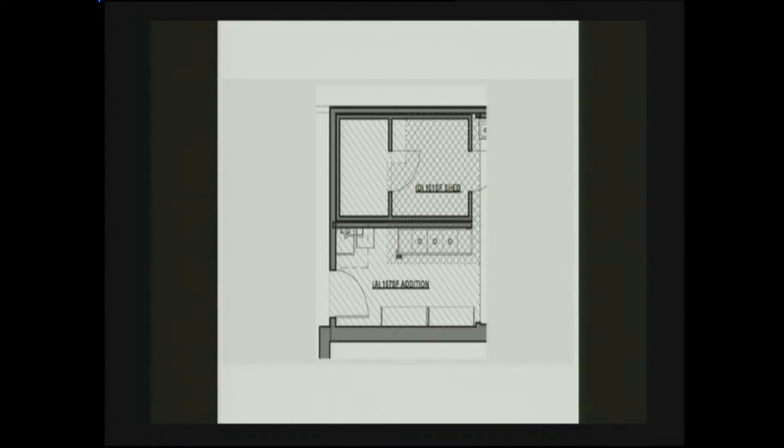In terms of the area of work, you'll see there on the sheet a pretty simple set of plans. The additional area in plan view, as I said, what we had already previously approved was an employee patio in the rear there and trash enclosures, fenced area.

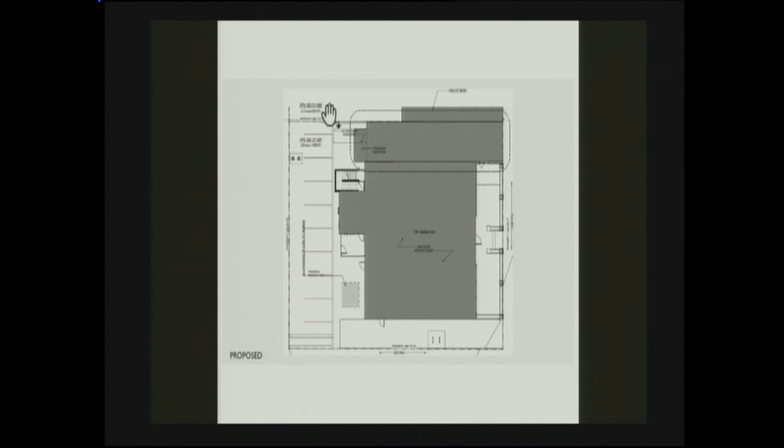So essentially what we have now is the addition would fill what was the previous employee patio area. And then this rectangle here is the temporary restroom that would actually be demolished, so that wouldn't be a permanent fixture. The trash enclosure would still function there.

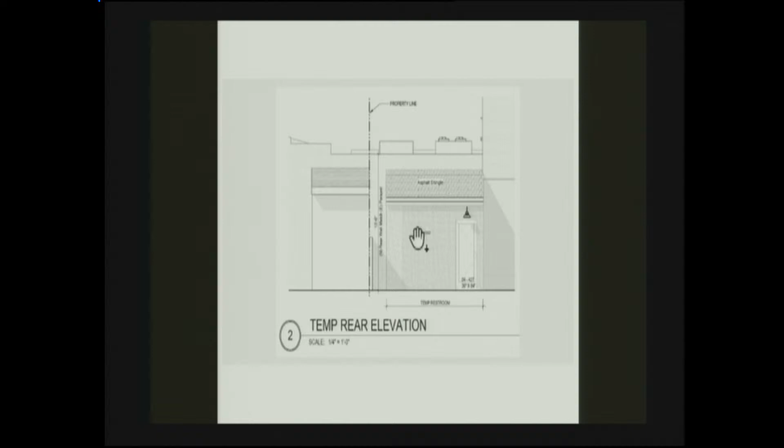So if we looked at it in elevation, here's what's there now on the right-hand side, and the little kind of tumble-down storage shed, which would temporarily look like this because this is the temporary restroom, and then permanently look like this. So the door into the facility, this shows that addition popping out, and then the fenced trash enclosure. In terms of its elevation, when you looked at it from the alley, it's basically the same as it was.

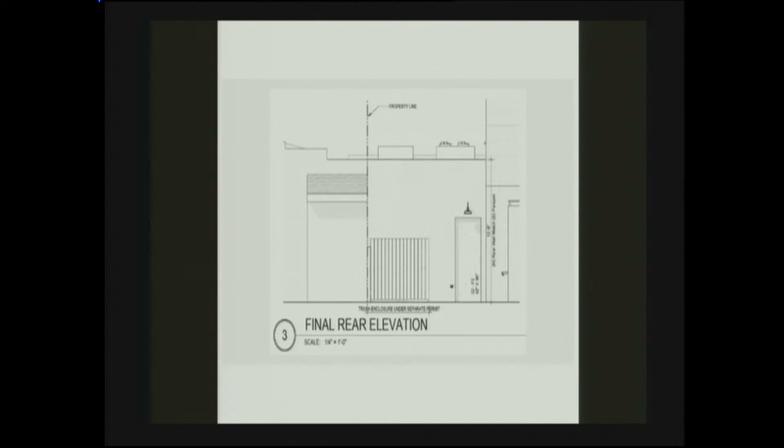That's it, I'll leave it to the applicants to fill in anything I may have missed. Oh, and we did have the project historians review it, and they're not concerned. These were not original portions of the building or part of the main Palms building itself.

So that's it for me. Anything you'd like to add? Well, I used your presentation, so it was really easy. Yeah, we're available for questions.

So my one question, just assuming that we need that trash area back, that's why it can't be a permanent installation, and that we're just limited on the square footage? That was my only question. Other questions from the board? Unfortunate you have to do that, but it's fine.

Do you need a vote? No, it's matters by staff. Just want to make sure everybody's comfortable with it and not something that would need to come back for formal review. We're not planning on taking this back to Planning Commission. The director can handle it as a minor director level change under our current ordinance. So we just wanted to make sure the director would like your feedback to make sure that's appropriate.

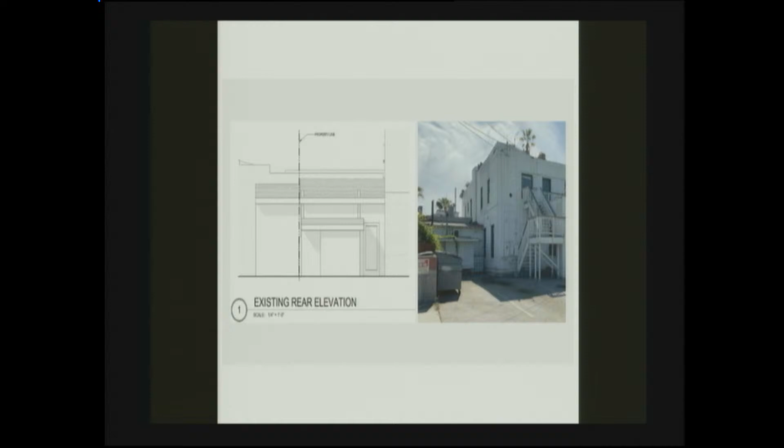Does anybody have any comments they want to add to the record? No, all good? We should go ahead and open it up for public comments since it's non-agendized, but it is a project. Since I missed the last meeting, this is my first go-round as official chair, so I apologize. Thanks for bearing with me.

Any public comment on this item? Anyone on Zoom? Thank you, Chair Blakemore. No one over Zoom. Okay, I think we got what we needed. Thank you, board. I think the applicant has what they needed, and we'll just keep pushing through, circle back on the administrative approval, and get that moving next week. Thank you.

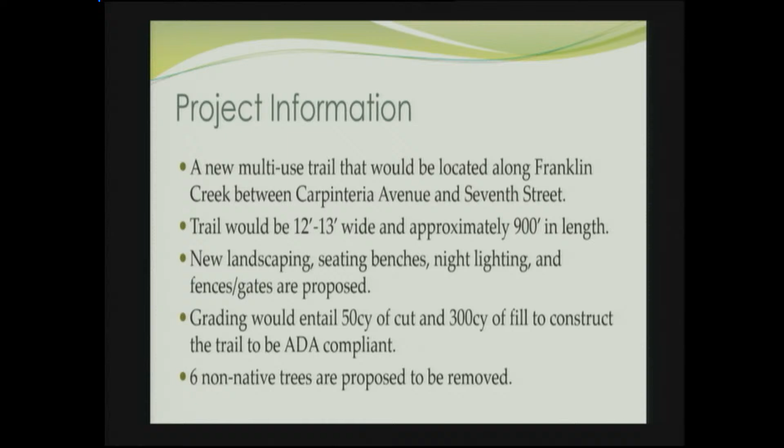So this is basically going to be a connector trail to replace an existing informal trail. The city received a grant as part of the Safe Routes to Schools program, which Josefina can elaborate on later. It's to improve this pathway with a proper trail instead of this informal dirt trail, connecting Carpinteria Avenue to 7th Street, which is also a major corridor to and from Aliso School.

This trail is also dual purpose. It's also flood control access because this is on flood control property, county flood control property. So the trail is going to double as access for their equipment to get in and maintain the creek channel, as well as for bikes and pedestrians.

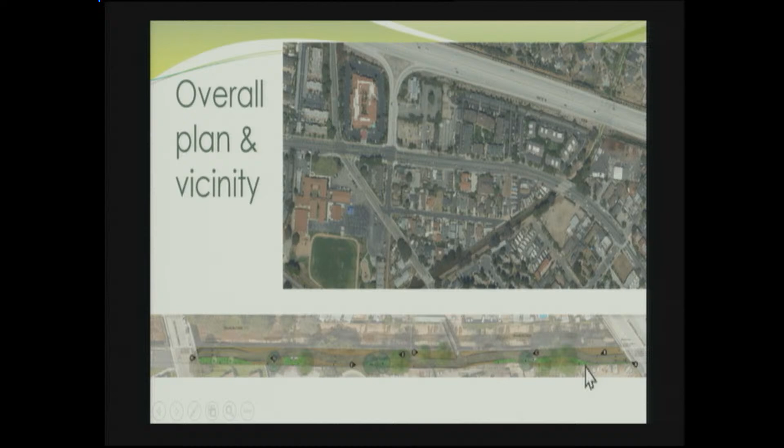And here's the south side of the plan, a little more detailed. So here's the bridge, the trail would start here. It's going to kind of meander to be somewhat natural. There's a little bench area proposed here.

No connection at the end of 8th Street. Just a couple people were wondering about that. There's not a connection at 8th Street, it's just a fence along there. Another little bench area here.

And then moving to the north towards Carpinteria Avenue, the trail comes along. This is where that existing bridge that comes from 9th Street ties in right here. And then there actually is access from the other end of 9th Street here to the trail and a little sitting area. In this area, there are 3 existing sycamore trees, which during our preliminary conversations with the Coastal Commission, they were very strong with their recommendation to keep those trees. So the applicant team has done a really good job, they had to do a lot of modifications to the trail, the layout, and the lighting to preserve these 3 sycamore trees here.

So you may recall these 3 sycamore trees from the Clintner project next door. The trees have been preserved, and when we get to the details I'll show you the special type of footing and permeable ground cover that they're using for the trail in that area to preserve the trees and protect the roots as much as possible. And then come down here, and it ties into Carpinteria Avenue.

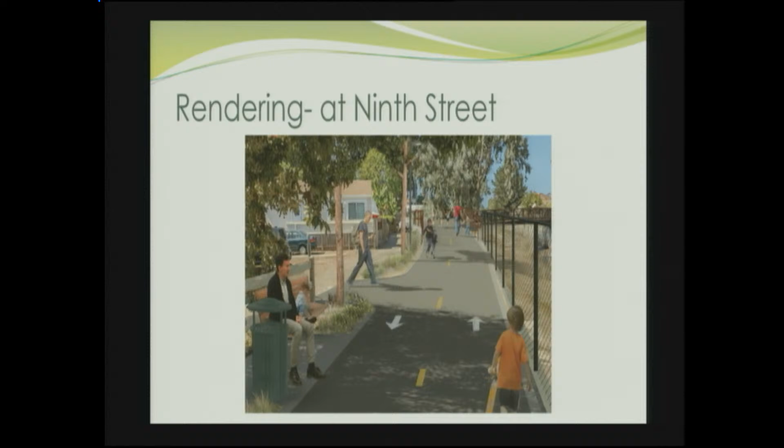Okay, and for the benches, they're proposing these two different styles.

And then these are the replacement fencing along the creek. There are five access gates to the channel for flood control maintenance, and then just the regular fencing along, and it would have the black vinyl coated chain link, and then with the fabric covering.

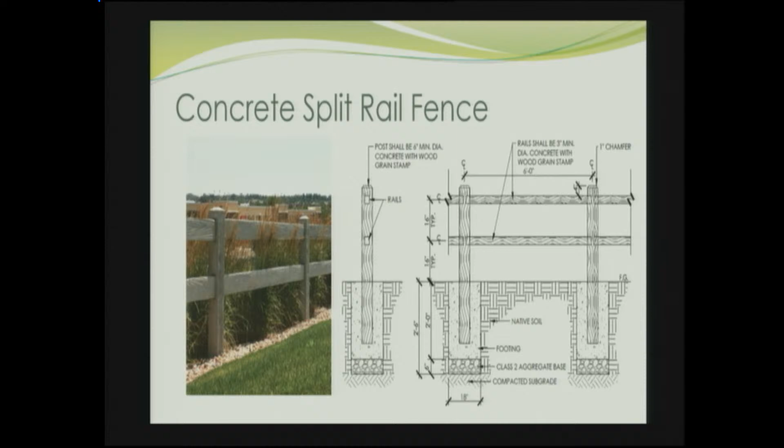And then here's the concrete split rail fence detail. This would be near the 9th Street entrance to the trail, because bikes could come in there too.

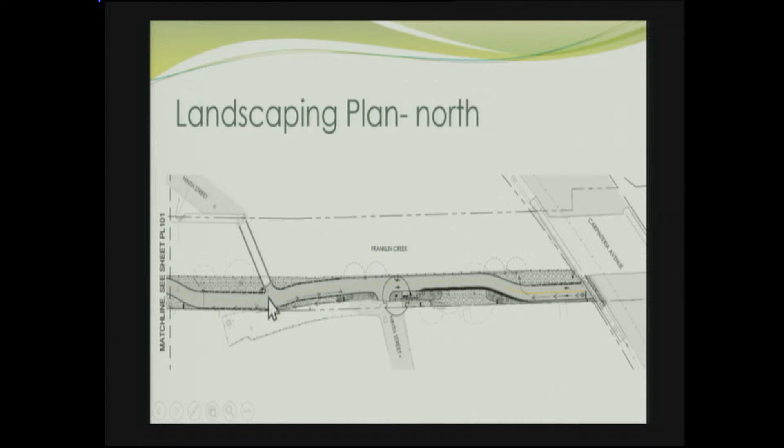And again, here we're getting back to the other end of the trail. Here's the 9th Street Bridge coming in. Another sitting area. Here's another new tree. And then here's where the sycamores are.

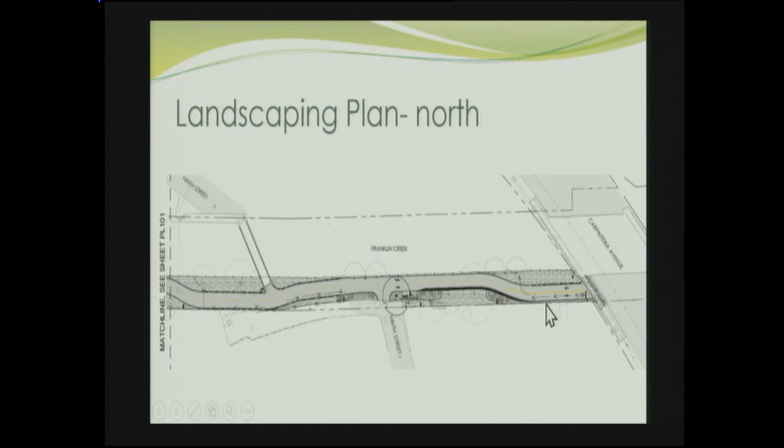And then Carpinteria Avenue. Now, the landscaping plant palette, Amy, we are going to need your input on. So we have our creek preservation program, which requires any permanent landscaping plants along creek corridors to be natives. And the applicant has provided a landscaping plant list.

The trees include our street trees. The island oak, I know, is a native that would count, and I know the toyon are natives, but definitely we're going to need your input on all the planting and your approvals that they're native. I think these ground covers are both natives, but the shrubs and the ornamentals, we're definitely going to need some input on which of these proposed species in the palette are native and what would be appropriate to use along the creek corridor. Or if there's suggestions for another species that you think would be better, we'd like your input on that as well.

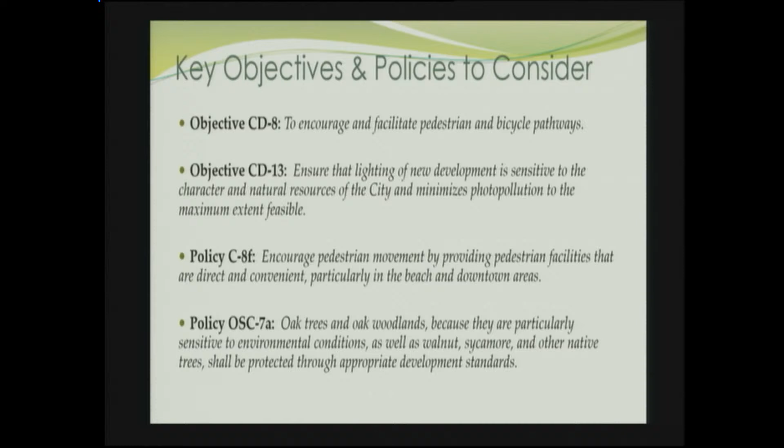So for the key objectives and policies to consider tonight: Objective CD8, to encourage and facilitate pedestrian and bicycle pathways. Objective CD13, to ensure that lighting of new development is sensitive to the character and natural resources of the city and minimizes photopollution to the maximum extent feasible. Policy C-8f, to encourage pedestrian movement by providing pedestrian facilities that are direct and convenient, particularly in the beach and downtown areas. And Policy OSC7A, where oak trees and oak woodlands, because they are particularly sensitive to environmental conditions, as well as walnut, sycamore, and other native trees, shall be protected through appropriate development standards.

So tonight for the board's discussion items, we'd like feedback on the proposed multi-use trail design, the proposed tree removals, and the proposed landscaping species, the proposed products for the benches, the fencing, lighting, and waste and recycling receptacles, and the proposed exterior light fixtures, including night sky compliance.

And just to add, regarding the proposed products, the light fixture design and the trash receptacles have been chosen because they're consistent with other ones that we use around town. And that concludes my presentation.

All right, thank you, Cindy. Did the applicant want to provide some additional information? Come on up.

Only Richard bites. The rest of us are very friendly. Just kidding.

I just wanted to say thank you for taking the time to review this project, and I wanted to introduce myself. My name is Josefina. I am the assistant engineer with the Public Works Department and also the project manager for the Franklin Creek Trail project. And with me, I also have Kayla, she is the landscape architect, and to the right I have John Lawson, he is the Public Works director.

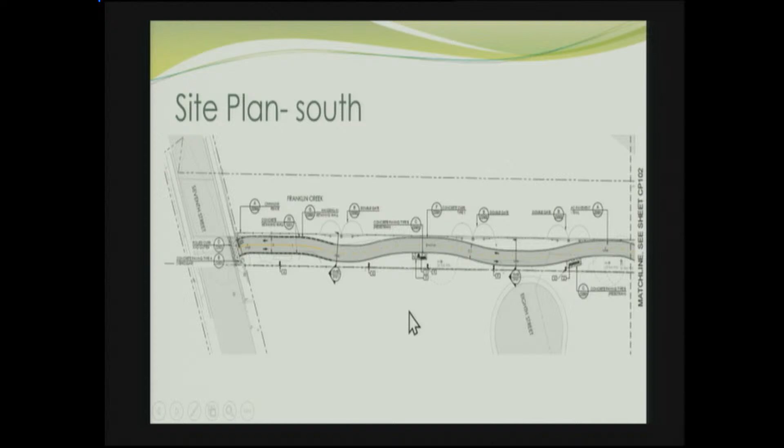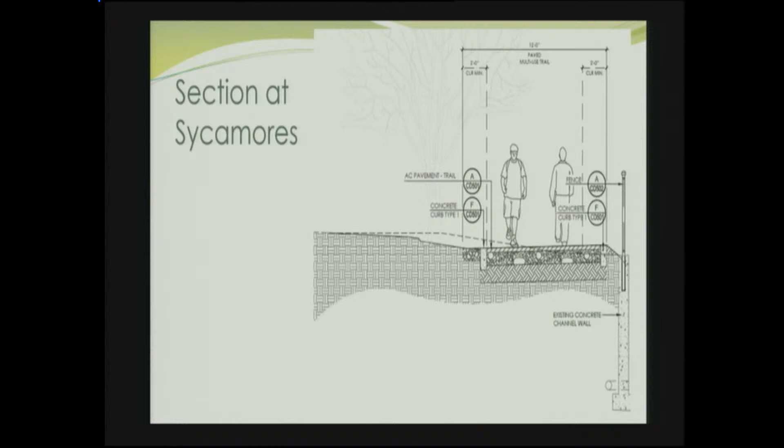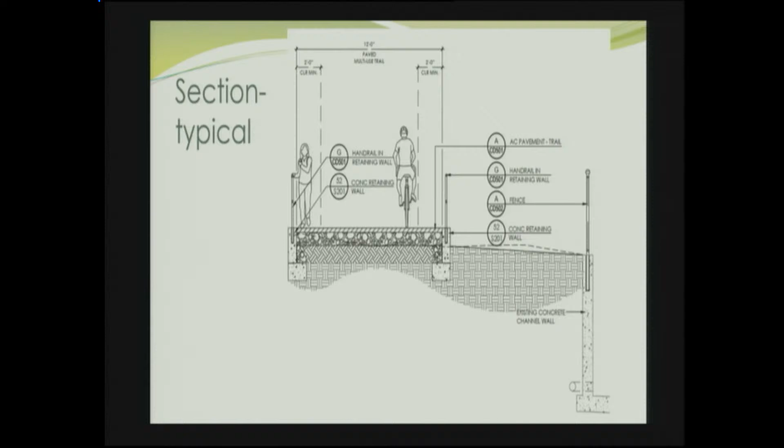With the Class 1 bicycle facility and allowing space for maintenance vehicles, standard trail widths are 4 feet each way, so that's what's driving the 8 feet total with the 2-foot clear shoulders. That's all usable space — it's intended for clear space of handlebars so nobody's running into things. Then on the lighting, the light pole fixture head is set at 10 feet, and the top of the pole is at 12 feet.

So that's just one clarification there. The lighting team worked closely with the planning department to comply with the Coastal Commission and creek preservation requirements, reducing the photometrics from some of our previous layouts to avoid impacts on the trail into the creek, and working with county flood control since this is their property. We were not able to place lights on the creek side, which is why you see them along the other side, working with dark sky compliance and utilizing a light fixture to reduce spill on the back side and make sure we're not disrupting neighbors.

Thank you, Kayla. That concludes us as applicants.

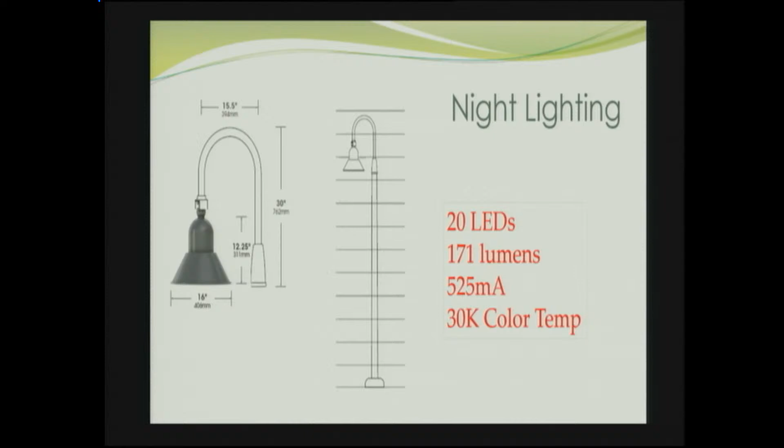Madam Chair, board members, thank you. I'll just add in, for what it's worth, coming from the CDD and planning side — Cindy has done a lot of work, thank you. Even though they're our internal customer, still public works staff, we in CDD have our local coastal plan requirements, including the Creeks program, and coastal commission communication on a monthly basis with them. So, I think on the CDD side, when Cindy and I first looked at the project, we were like, oh, we'll just shrink down the path and do this and use permeable and all.

As we got more detail about the nature of the path and the specifics of the grant funding, and the classification of the trail and safe routes to school—that it was not just pedestrian, it's for bicycles—it adds a whole other layer of requirements that wouldn't normally give CDD or your board as much flexibility, if it was some less formal arrangement without these funding requirements attached. So the public works staff came in with this project about 6 months ago, maybe February 2024. It wasn't because we didn't want to move this project along; it was because once you realize there are strings attached to the grant, it became not as easy to just make concessions and push it through. Just adding a little context there.

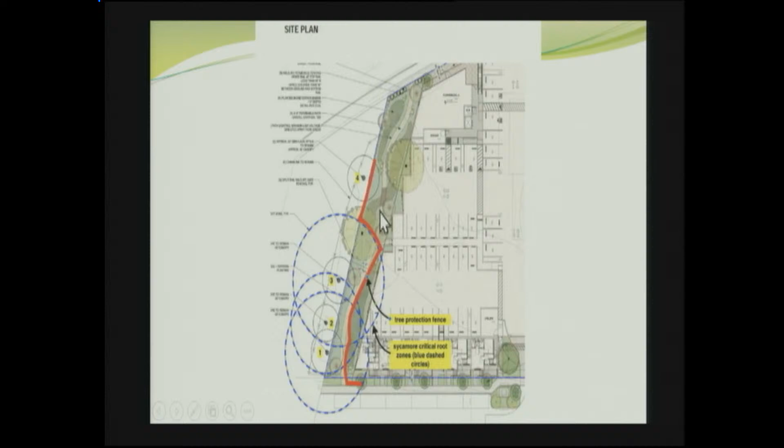So no conflicts there, and thank you, Cindy, for bringing this up. This was part of why we had to go back and forth so much on the layout of the trail, to make sure we save those sycamores, because we would not be doing our job as a city to have a city project impact trees that we were making a private applicant protect.

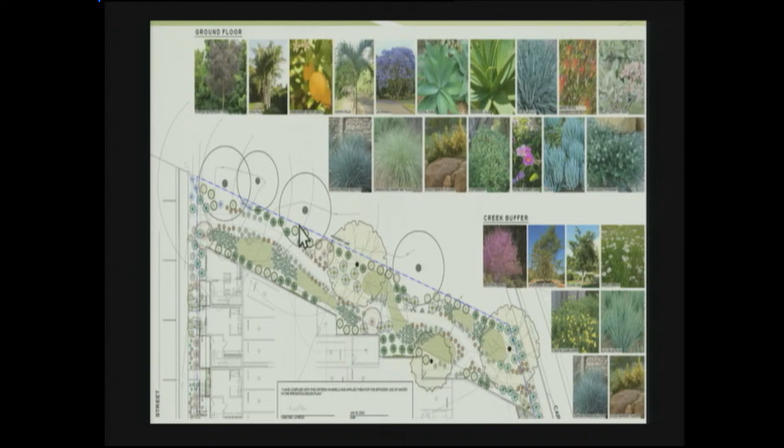I was going to comment as well on the drainage, that the city would not be allowed to drain off onto adjacent property, so our project is handling our drainage on site as well.

Thank you. Okay, any questions? No question.

I had two questions. One, just in light of the goal of the path collecting from the neighborhood, why was the decision made not to try to get anything from 8th Street? Just curious, because you do connect at 9th. So just wondering, because the cul-de-sac, it looks like it would be possible, but maybe I don't understand.

Was there any—I don't know, John, if you could speak a little bit to this—but I believe it had to do with the right-of-way at the end of 8th Street, that it was private right-of-way. Madam Chair, board members, so 8th Street is a fully improved roadway or street.

As you can see, it's an existing cul-de-sac, it has its own drainage, curb, gutters, sidewalks. 9th Street, as you know, is unimproved. So this project was also an opportunity, though not necessarily to directly address the lack of surface water drainage on 9th Street, but this is really just concentrated on the Franklin Creek Trail. The trail is not intended to take the surface water runoff from 9th Street.

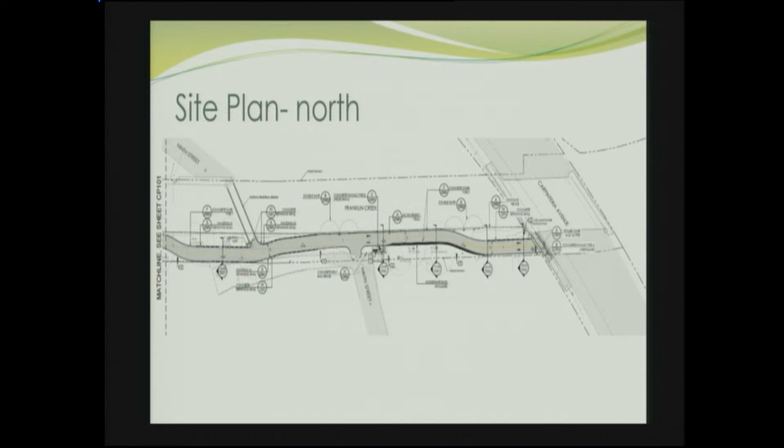Actually, the Clintner project at 4745 Carpinteria Avenue has, to some extent, been conditioned to improve the north side of the roadway, to also include curb, gutters, sidewalks, and connect to an existing or improved drainage at the terminus of that street, if you recall those improvement plans. So 9th Street still has some ways to go in terms of improving drainage, but fortunately you have a development project that's already going to address the north side of the street. This particular project, to answer your question again, Madam Chair, is not intended to take 8th Street drainage into the trail, because 8th Street is already improved.

My question wasn't necessarily just drainage, it's people—access for kids. I mean, if there's homes, I assume those are... I didn't get over there, which I really wanted to. There's apartments on 9th Street, but 8th Street is over that way. And I just wanted to see if there are people close enough there, because I know several of my children's friends would just go ahead and jump the fence and go over.

So just trying to see ahead into the future and plan for it accordingly. That's more of a comment than a question, so I'll retain that. But my other question is, when I'm developing things like this and end up with this much square footage of impermeable surface, I have to do some permeable paving. Is there a reason why all this is asphalt?

Yes, I could address that, because I was wheeling and dealing with the county flood control district on this one, and this is by my direction to the consultant here. As part of the deal with the flood control district, this is technically a maintenance road, so though the city has a secondary use agreement, it is conditioned by the flood control district to provide provisions for access to the channel.

So what does that mean? That means we have to provide an impermeable, asphalt concrete surface, structurally designed to accommodate their trucks or equipment to go in and clean out the channel. So that's the impetus of why it's pavement, it's impervious. So there's a higher load anticipated on the paving, so pervious paving wouldn't comply with that? Yes, ma'am. Got it. Okay.

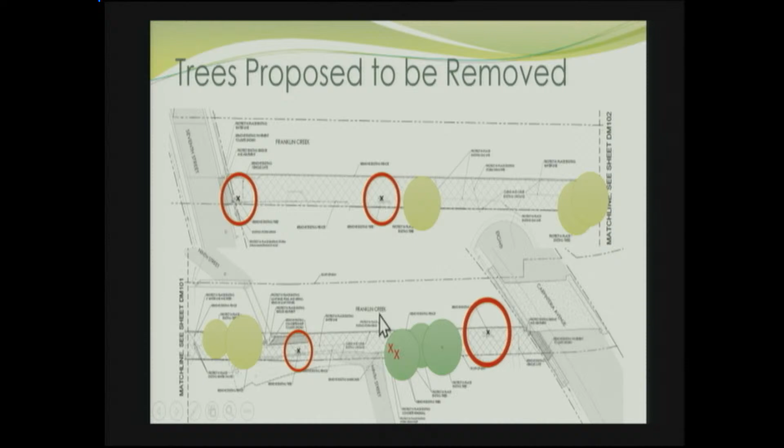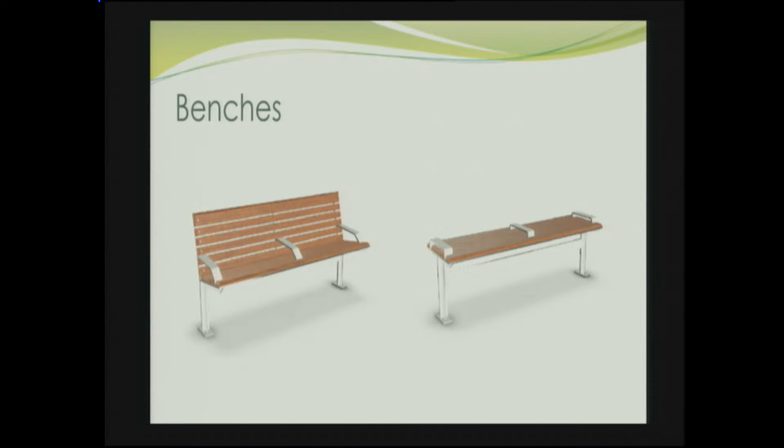I assume that has happened - I haven't gone through the plans to see which trees can be retained based on the meandering and whatnot, so I'd look for you guys to really look at what can be retained. Going a bit further, I think we've made an attempt with the quercus, but again with native trees, ISA has put some stuff out - I don't know how many landscape architects have seen that. I go to a few conferences every year and keep up on that stuff, and they've put out a list of about 10 trees in Southern California they're trying to promote, and they're not all native. As climate change and things change, we're looking at trees that might do well, so that's maybe something to look at.

If we can't get all island oaks and coast live oaks in there - it doesn't look like any are on the planting list - but personally, I'd hate to see more jacarandas go in there. That's just my two cents, going back to that.

On the landscape side, I'm a native plant advocate, so I'd really like to see all the shrubs, grasses, and ground cover going in there be as native and local as possible, and not see some of the varietals of salvia and whatnot. But those are pretty minor things.

I'll throw it back to you - I'm assuming you guys will discuss this, or it's already been discussed - but I'm one of those kids who grew up using that bike path up to the high school, and it was horrible 20 years ago, and I don't think it's been touched since. So there's a big concern there about the asphalt and what the maintenance schedule looks like. I'm assuming with the grants, there's no ability to use DG or any other surface there, and if flood control requires asphalt, I think it goes back to what the public is saying. We look at these things - what's been there for the last 60 years, since it went in, or 50 years since flood control - is sufficient for their purposes, right? So having that understanding, going back to what we're going to get going forward, and what the city will be held to maintain, I think you guys are all looking at that. Just wanted to throw that out there, and appreciate you guys bringing it forward again.

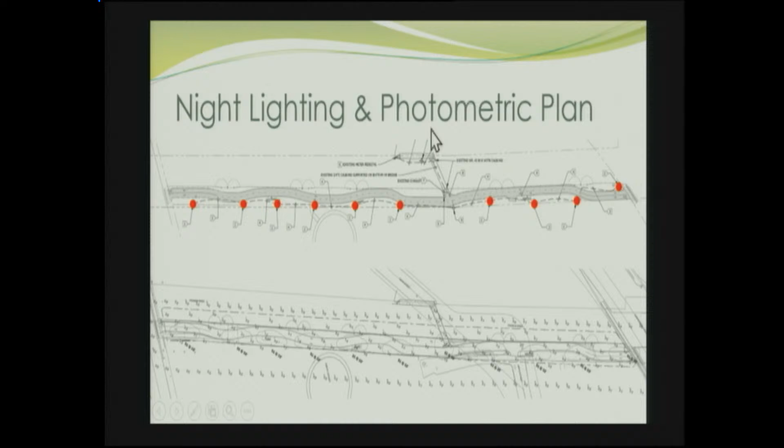Did you say something about fabric on the fence? Yes, the new fence going along the creek channel is going to have fabric on it. Let me find that detail for you. Right here - it's going to be vinyl coated black chain link, with fabric covering specified right there.

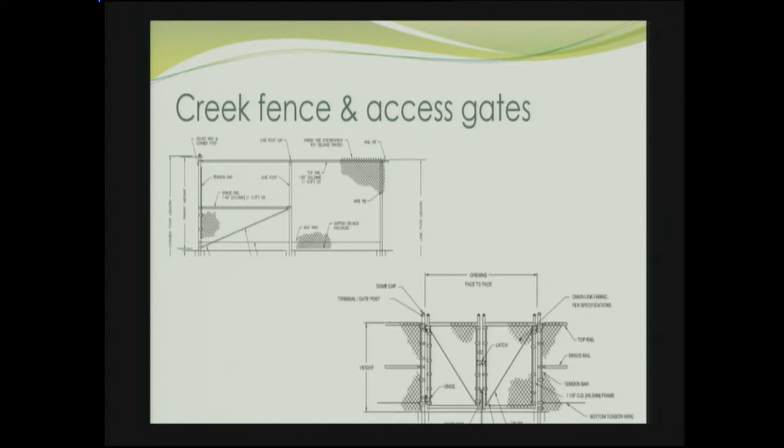And the wood fence, I was also concerned about because it is graffiti heaven. And Brian Motes takes care of that all the time - he's in charge.

Nobody's asked this question - how do you get the fill from Carp Avenue to the drop-off there to make it level all the way across? How does that happen? They take a dump truck and drive it down the road. You're going to elevate that fence, because by the time you put the fill in, and the fence is this tall, and you put the fill into there, what happens?

Well, that's why they're going to have the little retaining walls. Okay, and then there'll be fencing.

What's a possible start date? Yeah, I think that's kind of what we're here to figure out - it depends on how quickly they can answer all our questions, I think.

Well, just to map out - we have this architectural review board meeting today, and then their recommendations. The board may ask for clarifications or changes that would need to come back to them, or they may say we're satisfied, and then the next step would be planning commission review of the project as well. So we're talking several months out to get to planning commission, and then there's the rest of the funding and construction and so forth.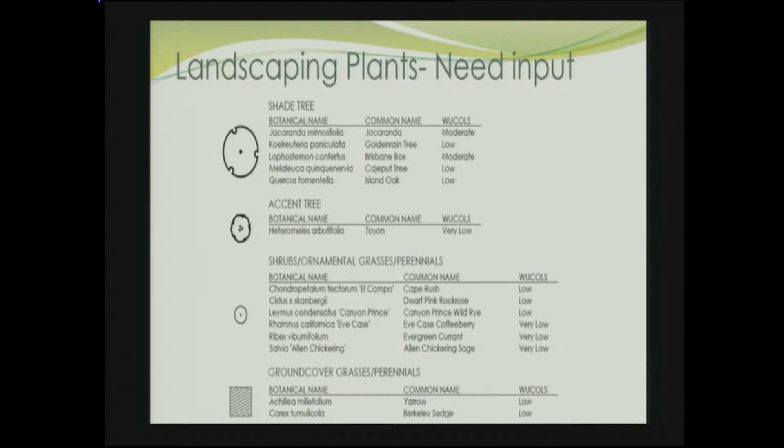Scrim, or green, right. It's just the technical terms that you're seeing in here related to construction documents, unfortunately. Okay, thank you, I could have saved a lot of comments in my written things, but thank you for clarifying and educating us.